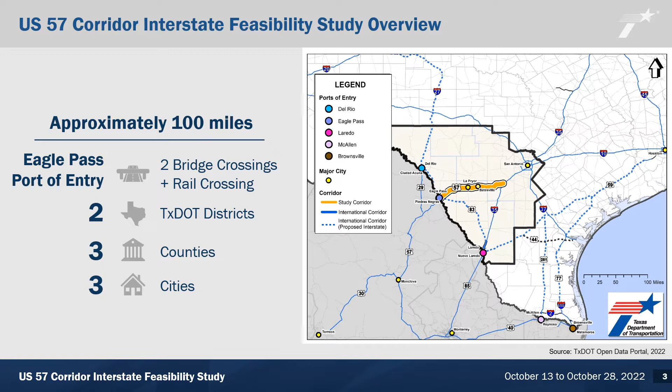The US 57 study corridor extends approximately 100 miles from the Eagle Pass International Bridge on the Texas-Mexico border eastward to I-35 in Moore. The corridor traverses the Laredo and San Antonio districts for TxDOT. It runs through Maverick, Zavala, and Frio counties, and the cities of Eagle Pass, La Pryor, and Batesville. US 57 crosses US 277 in Eagle Pass, US 83 in La Pryor, Farm to Market 117 in Batesville, and I-35 in Moore. There are 3 border crossings at the western end of the corridor in Eagle Pass.

TxDOT is assessing the feasibility of upgrading US 57 as an interstate highway, as well as how to improve connectivity and capacity, enhance corridor safety, align with existing plans, and support future development and economic opportunities.

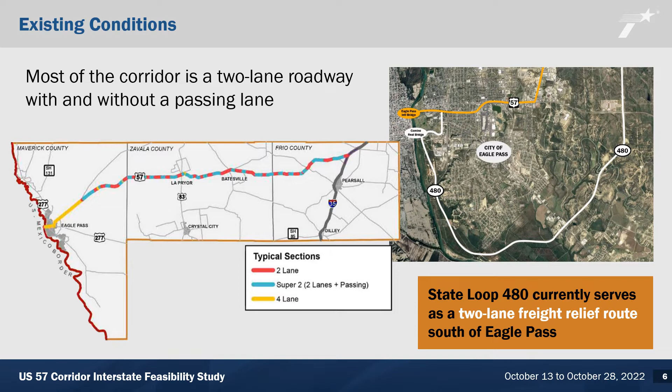TxDOT is conducting the study for many reasons, including the corridor's significance to international trade, anticipated growth, and high crash rate in certain sections. As shown on the map, the area in and near Eagle Pass is 4 lanes, and the rest of the corridor is 2 lanes, with and without a passing lane. State Loop 480, which is a 2-lane roadway, currently serves as a freight relief route south of Eagle Pass.

Let's move on to a high-level overview of the study data that was collected and analyzed. The study team collected a wide range of data for the study area, including, but not limited to, growth projections, freight movement, key industries served along the corridor in both Texas and Mexico, traffic flow, and safety analysis.

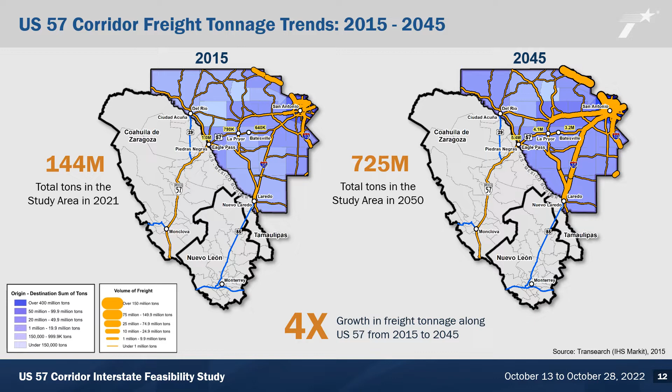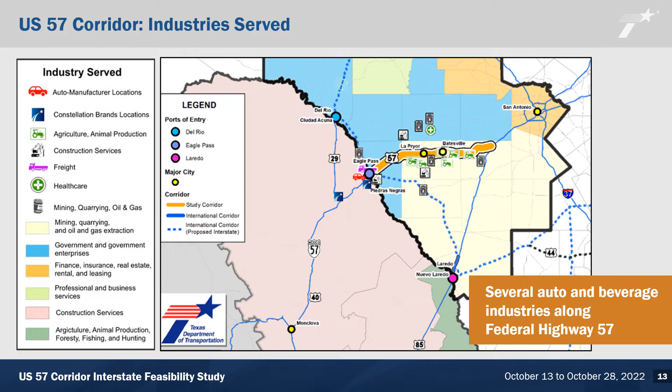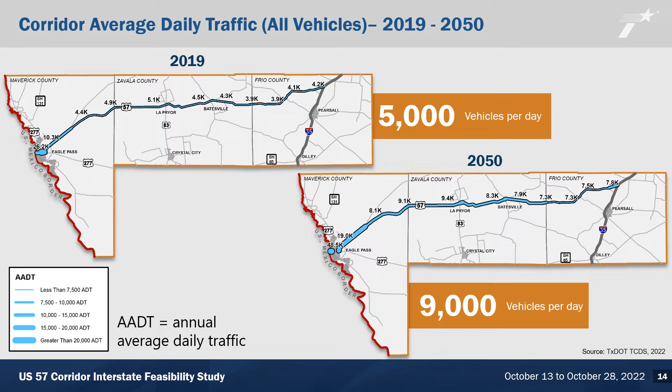This map shows major industries served in the study area. Several auto manufacturers and beverage industries are located along Federal Highway 57, corresponding to the top imports through the Eagle Pass port of entry. US 57 currently carries about 5,000 vehicles per day and is anticipated to carry about 9,000 vehicles per day in 2050. Commercial motor vehicles constitute 25% of all vehicles along US 57, which is higher than a typical CMV percentage for similar facilities.

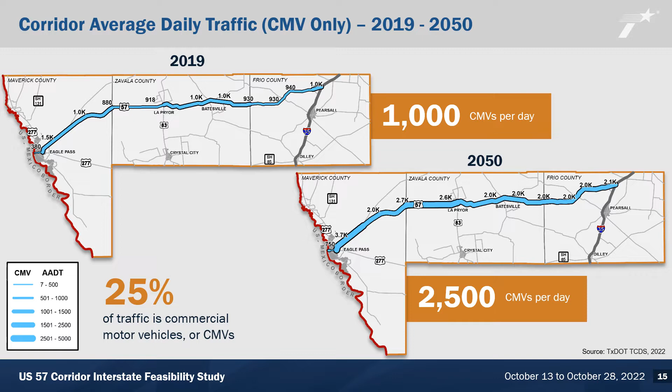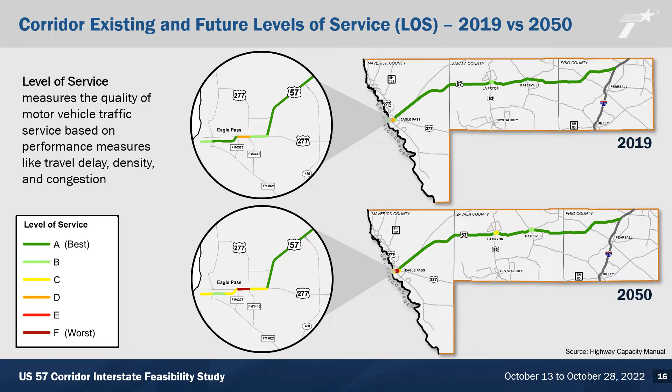The data shows acceptable existing and future traffic level of service along the majority of US 57. There are a few locations within Eagle Pass that will be at unacceptable traffic level of service, meaning more congestion and density, in the future. 2/3 of all crashes on the corridor occurred in Eagle Pass, and in select sections of the city, the crash rate is 3 times the statewide average. However, 89% of fatal crashes occurred outside Eagle Pass along 2-lane sections of the corridor.

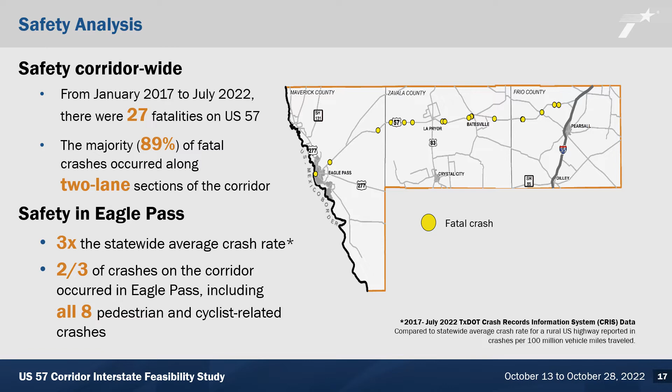The study team visited Coahuila, Mexico in July 2022 to meet with local government and industry leaders. Coahuila has pledged $270 million of investments to improve the Eagle Pass port of entry and roadway infrastructure due to anticipated development and cross-border trade growth. We have shared some of the study data collected. Let's move on now to discuss our findings and recommendations for the corridor.

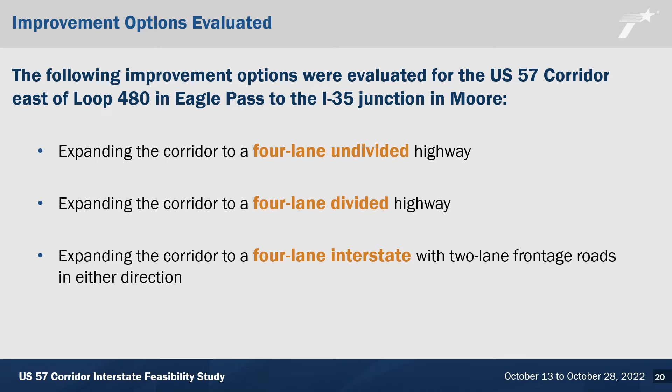The study team evaluated the following improvement options for the portion of the US 57 corridor east of Loop 480 outside Eagle Pass to the I-35 junction: expanding the corridor to a 4-lane undivided highway, expanding the corridor to a 4-lane divided highway, and expanding the corridor to a 4-lane interstate with 2-lane frontage roads in either direction. The improvement options will be reviewed on the following slides.

The 4-lane undivided highway option establishes 2 lanes of traffic in either direction, increasing capacity. This design maintains driveway access and currently posted speeds, as well as at-grade intersections with other roadways. It does not include expanded shoulders or separation of traffic that would enhance safety.

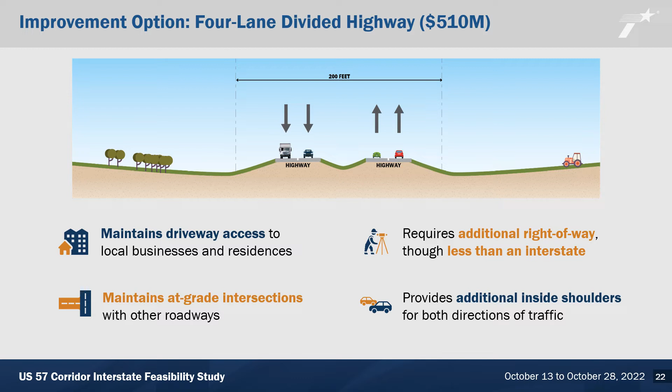The 4-lane divided highway option includes 2 lanes of traffic in either direction, separated by an interior median and inner shoulders to enhance safety. This design, similar to the 4-lane undivided highway option, also maintains driveway access, currently posted speeds, and at-grade intersections.

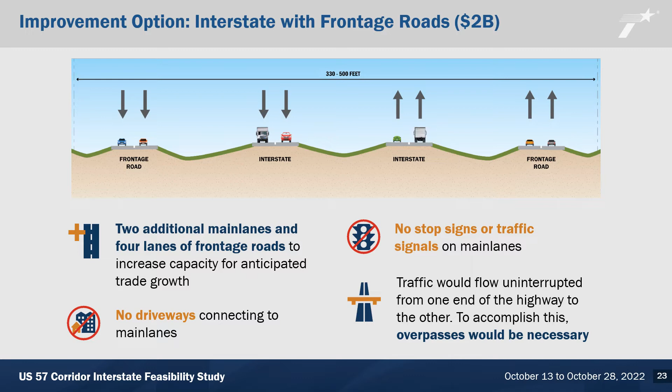The interstate option establishes a 4-lane interstate with 2-lane frontage roads in either direction. Traffic would flow uninterrupted from one end of the highway to the other to increase capacity and traffic flow efficiency, which would require overpasses. Driveways would connect to frontage roads as opposed to interstate main lanes.

The 4-lane highway options would cost almost a quarter as much as the interstate option. The 4-lane divided highway and interstate options both improve safety by separating directions of traffic and adding inner shoulders. While the interstate option provides greater capacity, it is much less cost-effective than the other 2 options. The 4-lane divided highway is the most cost-effective and provides both safety and capacity benefits.

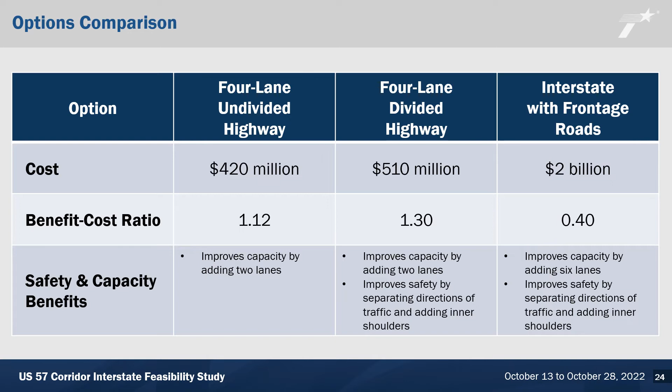Based on our analysis, the US 57 corridor does not currently meet the criteria to upgrade to an interstate. However, the US 57 corridor should be improved for several reasons, including safety incidents along the corridor, limited freight connectivity, projected population, employment, and trade growth, to better promote international trade and improvements to related infrastructure, especially as more manufacturers relocate operations closer to home due to shifts in the global supply chain, and to align with other regional planning efforts.

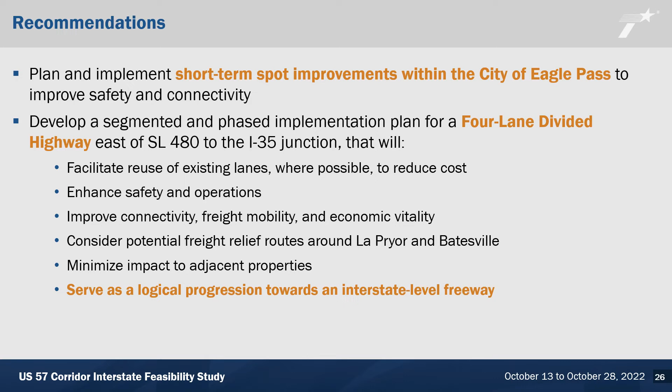The study team recommended short-term spot improvements within the city of Eagle Pass and a segmented and phased implementation plan for a 4-lane divided highway that will serve as a logical progression towards an interstate-level freeway. In the short term, over the next 5 years, spot safety, operational, and intersection improvements should be planned and implemented in Eagle Pass, as well as traffic signals at the intersections with US 83 in La Pryor and Farm to Market 117 in Batesville.

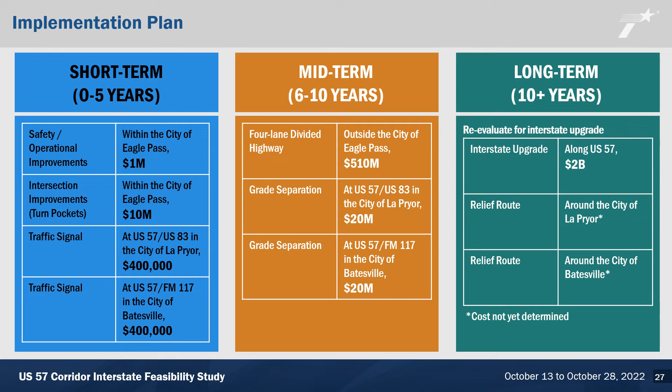In the midterm, over the next 6 to 10 years, the current study recommendation is to further develop the 4-lane divided highway improvement option for the US 57 corridor east of State Loop 480 to I-35. Grade separation is recommended at the 2 locations recommended for signalization in the short term. Long term, the study recommends further assessment of interstate upgrade along US 57, as well as potential relief routes around La Pryor and Batesville.

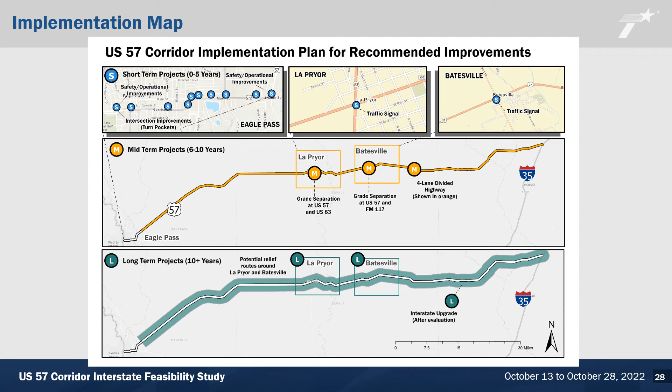We are currently in the feasibility study stage of the process, where we've focused on data gathering and preliminary analysis to assess the practicality of upgrading US 57 as an interstate highway. Should the corridor-wide study recommendations move forward, the project must be included in the Unified Transportation Program and go through TxDOT's project development process. Several major tasks and more opportunities for public input would follow before construction can begin, including securing construction funding for the project in the Statewide Transportation Improvement Program.